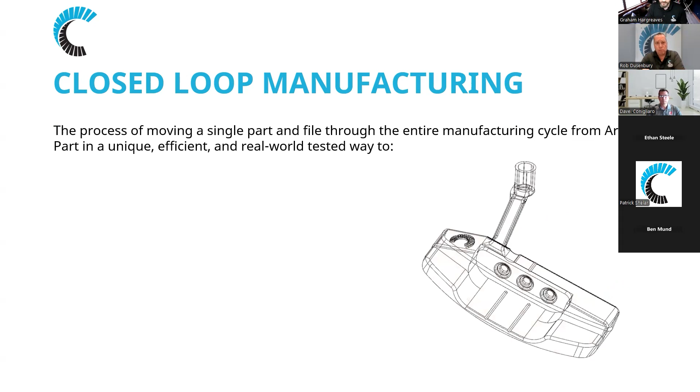So the closed loop manufacturing process, it's really taking a part from art to part in a unique, efficient, and real world way. This putter right here was actually something that we tested it out with. So we took it into Verisurf and reverse engineered an existing putter head, made some changes to it. We actually printed fixturing with Roboze on Carbon PA Pro because it's a relatively unique fixture. And then the putter was printed in stainless steel.

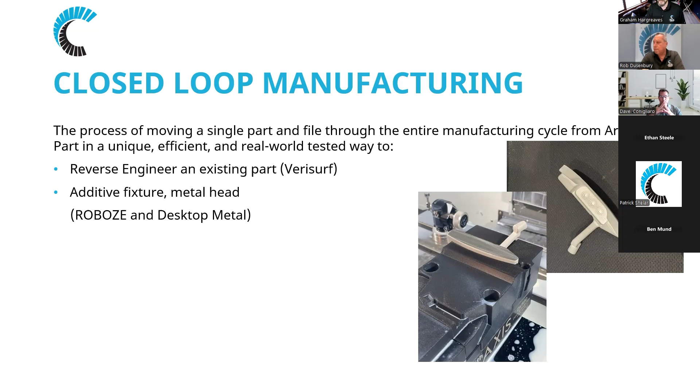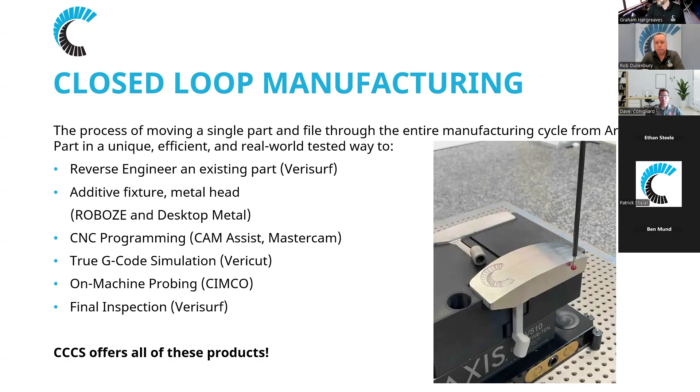The CNC programming aspect, we have CAM Assist, which is an AI tool that can plug into Mastercam as well. We then ran it through simulation in Vericut. We did some probing in CIMCO, so you get your probing routines in there. And then when it was done, we actually inspected it with Verisurf as well. So we do offer all of these products. We support them. And this is the putter in real life, and it did not help my golf game.

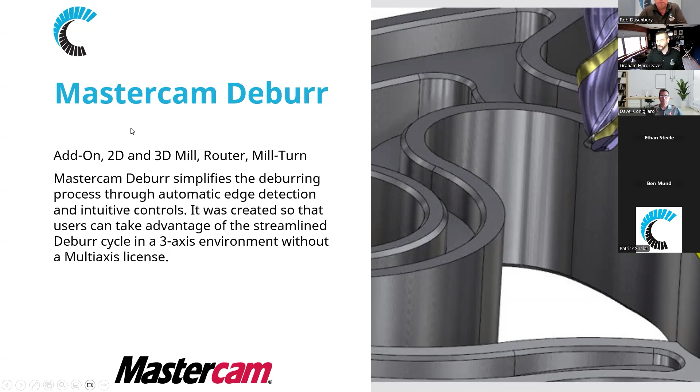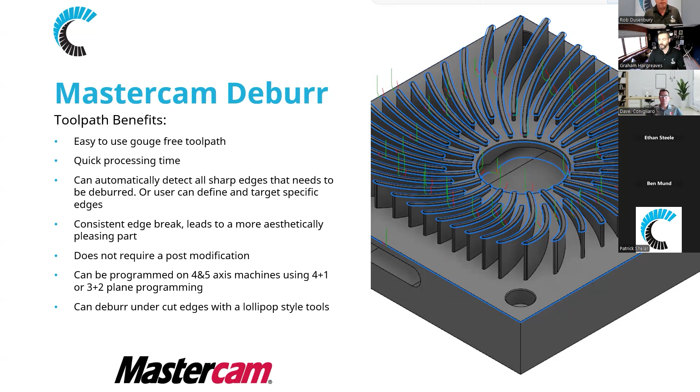And moving along, staying connected, we have Mastercam Connect. Now, you've probably heard of Mastercam Connect over the last few months. Basically, it's maintenance. But the advantage of staying on maintenance is that we released this Deburr toolpath program in 2025 when it first came out. And those were the tools that were supported: the lollipop, the taper with full radius, and a ball end mill.

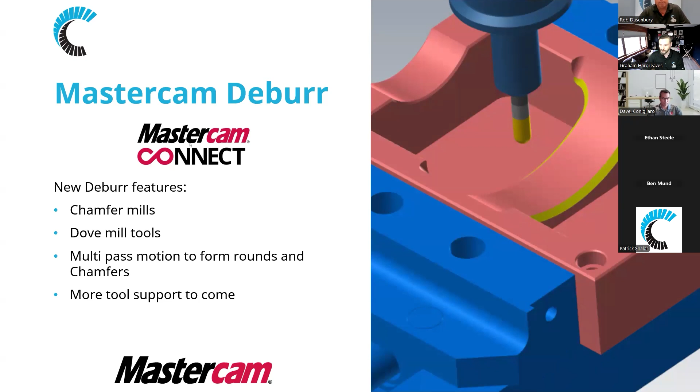Now, in the latest update 4 in 2025, we now support chamfer mills, dove mills, multi-pass motion for rounds, and chamfers. So pretty much the same controls that you have in your multi-axis Deburr, but locked down to, of course, 3 axis. And then, of course, more tool support to come. Okay, so that's how the toolpaths in this program work.

Now, I do want to add some additional talking points, and I think this is a really important talking point. Just safety. As you guys are aware, deburring parts, taking parts out of the machine with sharp edges, having to flip them over, moving it around, first that obviously creates a safety hazard. But also it can create inaccuracies in the part itself, especially if you have to take the part out of the machine to deburr, put it back in the machine for other operations. And of course, dealing with the sharp edges.

Also, I did this really quick Google search here on OSHA and found out that companies are losing employees for days or weeks due to lacerations, and it can cost the company up to $46,000 in direct and indirect costs. And I thought that was pretty interesting because, if you've been in this business for a while, you've probably sliced your fingers once or twice here or there. So obviously it can create hazards in the workshop. Go ahead and switch it.

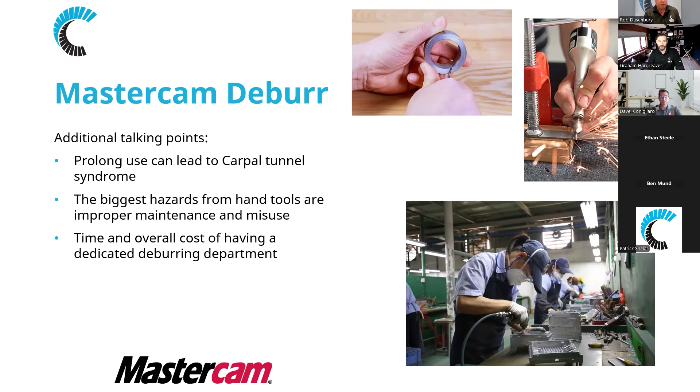Okay, so some other talking points. Using hand tools obviously can prolong and lead to carpal tunnel. The biggest hazard of hand tools is just improper maintenance and misuse. That's obvious, and I'm sure you guys have experienced it. And then the third talking point here is just the time and cost of an overall dedicated deburring department. If I can do this all in one shot, all on the machine, then this is a hazard that I don't have to pay for or deal with.

I think this is where you wanted me to go in and demo, right? Or I can't remember when you changed that.

Yeah. Okay, so I'm going to demo the product, and then towards the end, I'm going to show you how fast the calculations can be.

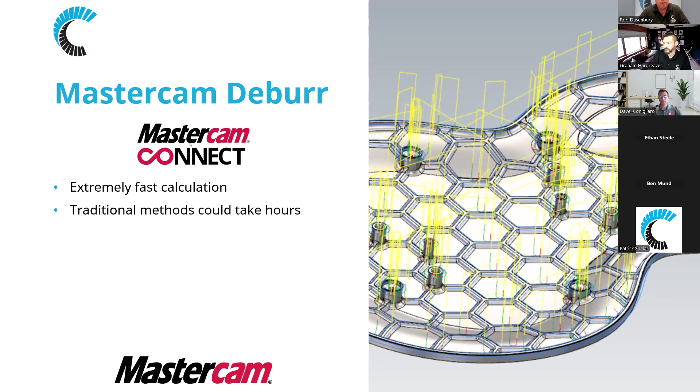So if you haven't seen it, we machined this part, this guitar at IMTS, and this is the bottom half of the guitar body. So you can only imagine how big this part is. Obviously, if you were going to try to deburr this on the machine, it could take hours to program.

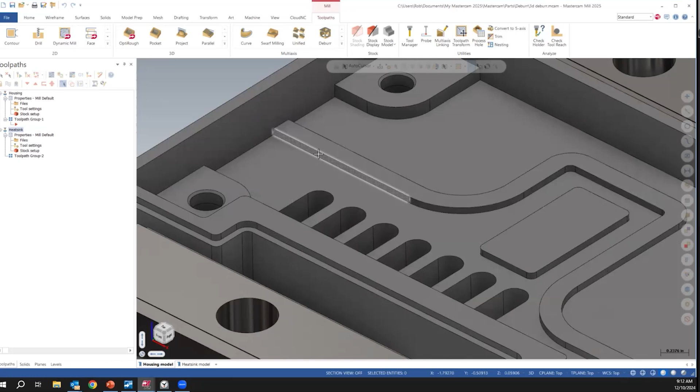So let me do a couple of things here. I'm going to share my screen now, Graham. I'm going to run through a few parts here. Here's a typical housing. As you can see, deburring this part, taking it out of the machine and having to scrape this with a deburr knife could be pretty difficult, especially when we're coming up against walls and very close to floors. I may not even be able to use my deburr tool in this area because it could scratch this floor.

So in 2025, and again, this is update 4, in the gallery here, we have the deburr toolpath. I'm going to grab a ball end mill, and we'll go through the cut parameters. For the machine geometries, I'm going to select the whole part. Okay, get that triple click. The reason I selected the whole part is this toolpath is gouge proof. So it's looking at all of those pieces of geometry and gouge checking against them.

For the edges, we have this auto detect. The auto detect can take care of all of the sharp edges, every sharp edge that it can find. And this may just be enough. However, if I do use auto detect, I can exclude edges. So if there's edges that I don't want it to find, let's say this is going to be chamfer milled, there's probably no reason to deburr that.

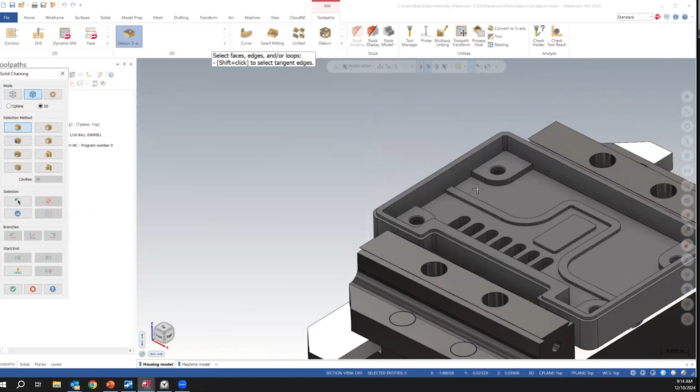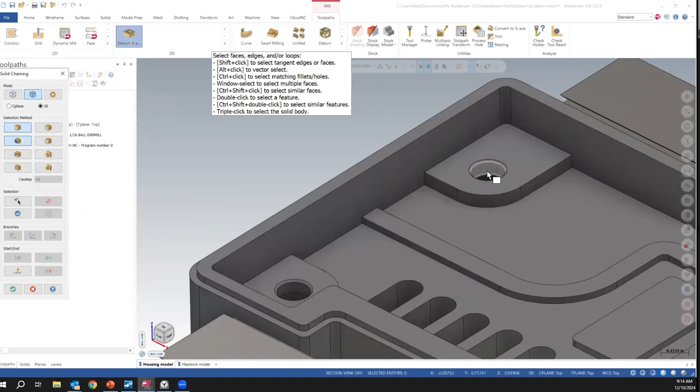So I'm going to come in here and, oops, hold on. I'm going to grab those edges. Actually, take that back. I'm going to clear this. I'm going to grab all those edges. I just held down Control Shift and picked those. Okay, so I'm going to exclude that geometry. We'll come back to some of the other settings as we go along.

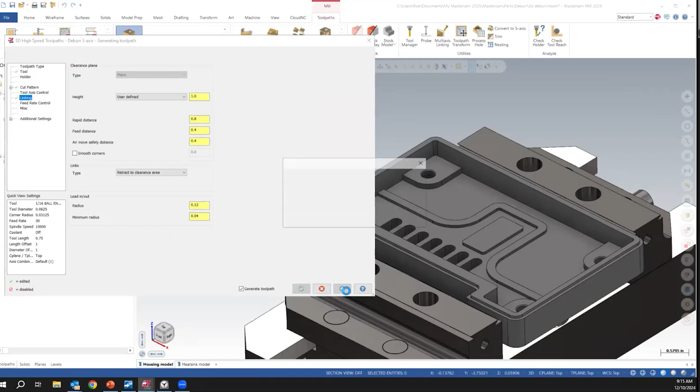With the edge shape, how much do I want to break the edge? Let's say 10 thou. Tool axis control, obviously it's 3-axis, locked to the Z. Linking, I just want to be 1 inch above. There's some automatic settings here. This menu is pretty similar to what you've seen with other toolpaths inside of Mastercam. And some feed rate control. But as it sits right now, I'm just going to hit the apply button and let that run through.

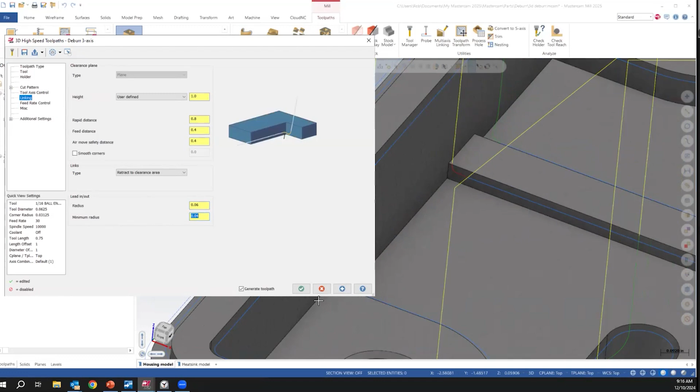And as you can see, that quickly, all of those edges are nice and deburred, gouge checked. You have some control here. We can tighten up the radius, maybe get this a little closer for the lead ins and lead outs. Again, it's completely gouge checked on those edges.

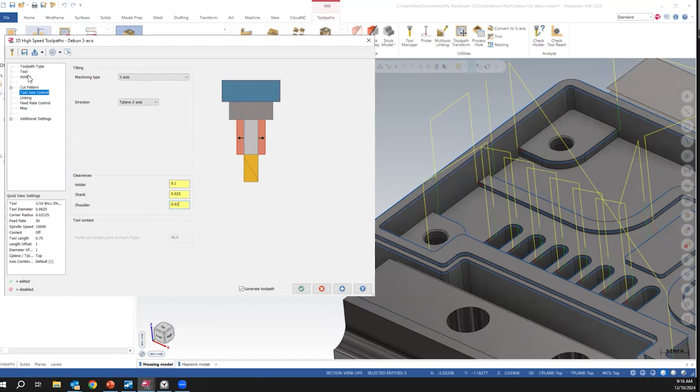In the tool axis control, this is where it's gouge checking. Here's your clearances. So I have 100 thou on the holder, 25 on the shank, and 10 on the shoulder. Those can all be adjusted, but going back to your tool, it better be defined properly, and same with your holder, to make all of that work. And we'll give it a quick run through here.

And again, nice, clean, sharp edges. Everything is consistent. And this is what literally separates one machine shop from another shop. If I sent this out to a customer, he's going to be more happy than if he saw a bunch of scratches on the part and inconsistent deburr operations. This is just clean and gouge free.

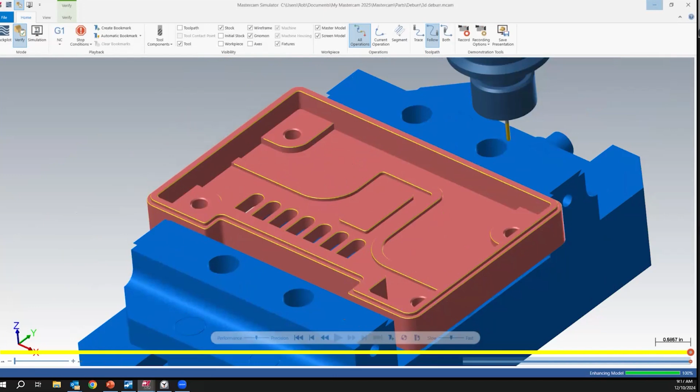Okay, so moving on, I'm going to go into my next part here. Let's turn off this guy. So on this part, I have this heat sink. Reason I made this part is obviously heat sinks are nasty, a lot of sharp edges, a lot of deburring. Very daunting if you had to do this in program.

Not only that, if you had to program it manually or traditionally, again, we're looking at this and obviously it's a 3-axis part as well. And again, keep in mind, this can be added to a 2D mill or 2D router. So we'll go back into the Deburr. I'm going to switch over my tool. And again, I'm going to grab the whole part.

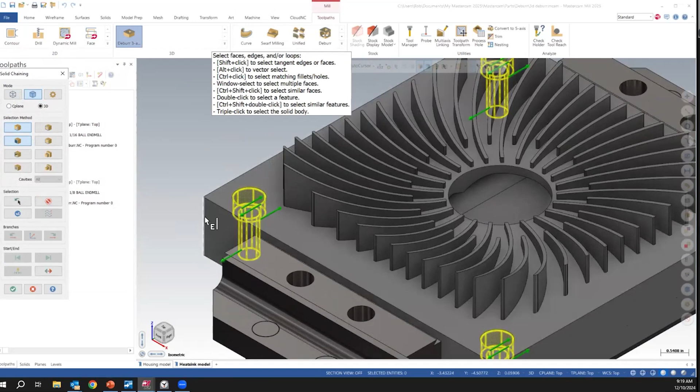And I'm going to leave this on auto detect. I'll come back to the other option, user define, in a second here. Again, just want to exclude. And again, I'm going to hold down Control Shift and double click on that to grab those features. I'll break the edges by 10. And again, let's set the linking. Let's make that like 1 inch. Okay.

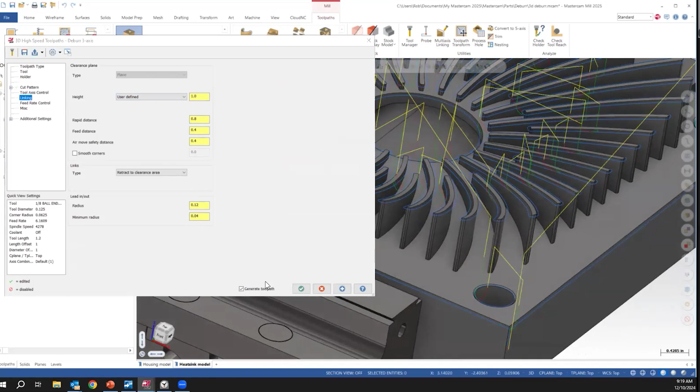So I hit apply. And let's get out of here. Oh, I must have left out an edge. No big deal. We'll come back into the cut parameters. Let's just add. Let's add those. Okay. All right.

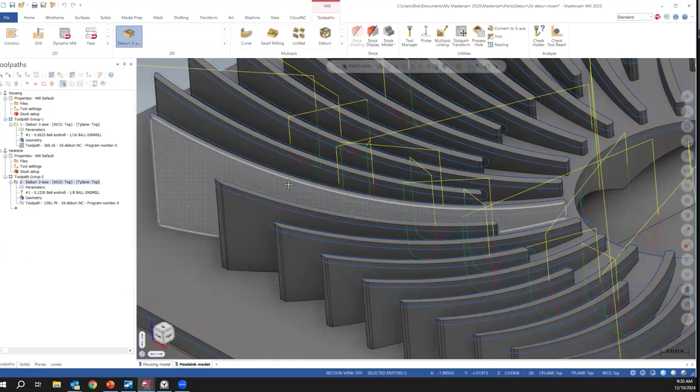Now, as you can see here, nice, clean, again, gouge free, checking against the other blades. Of course, if I went in with too big of a tool, then it would trim it back. So it may not deburr everything because of the gouge checking.

So another feature that we have, I'm just going to copy after here, is the ability to use lollipop cutters. Now, this has been a request from 25 years since I've been with Mastercam, that everyone wants to do an undercut with their mill product without having multi-axis. As you know, you can do this with a lollipop cutter, but you'd have to turn off all

your gouge checking. We tell you you can use contour and surface contour, or you can use flow line with all the gouge checking turned off. But of course, when you turn off the gouge checking, you're on your own. Lead ins and lead outs don't happen for you, all that stuff. So with this enhancement, instead of doing the auto detect, I'm going to do a user define here, and I'm going to grab

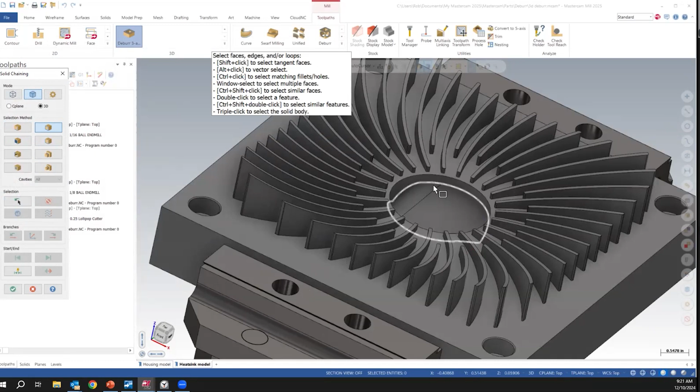I don't know why I'm... I want to grab that loop. I'm having mouse problems. Okay, I'm going to grab that loop. Again, now 10 thou. Tool axis control, everything's still the same. All I really did here was just switch over to the lollipop cutter, and we'll apply that.

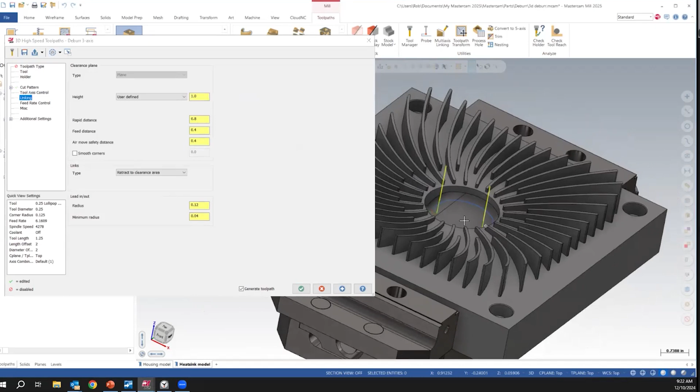And as you can see, a nice, clean, gouge-free undercut. And I can't tell you how many times I've had customers request just to do this. Okay.

Now, one of the other advantages to this new update is we now included the ability to put rounds on these edges. So even though I have this part here that is an undercut, this is another feature that you guys have been requesting. If you had a fillet in here, and of course I'm not going to draw in the fillet, I'm just going to tell it that I have a 30 thou

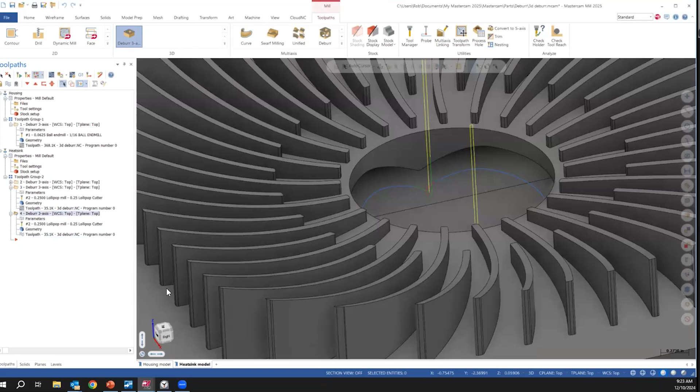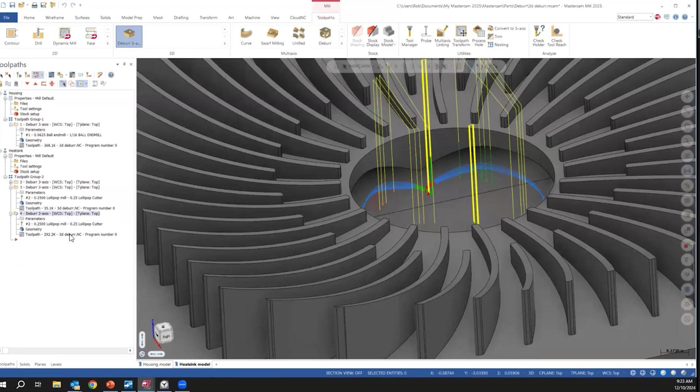rad there, and I'll set that to round, and I'll give it, I don't know, 10 passes. I'll hit apply. And as you can see here, let's just take that in. Okay. So now we can apply those radiuses on those corners.

Definitely having mouse issues. On those corners, and again, all gouge free, not a whole lot of work. Obviously, I didn't have to do a whole lot of work to put that in there. Just had to tell it the size of the rad. So that's enhancement number 1 in the update 4.

Enhancement number 2, we can now apply chamfer tools. So for instance, now if I want to come back in here, I'm gonna just do a copy after. I'll kill this, and I'll move over to my chamfer mill. And user-defined edges, I just want to do that loop right there with a 30 thou chamfer.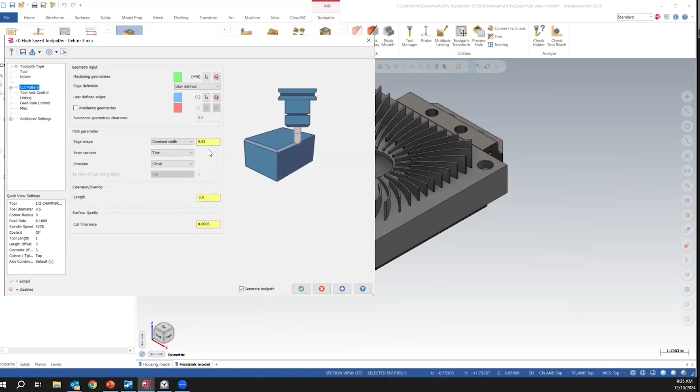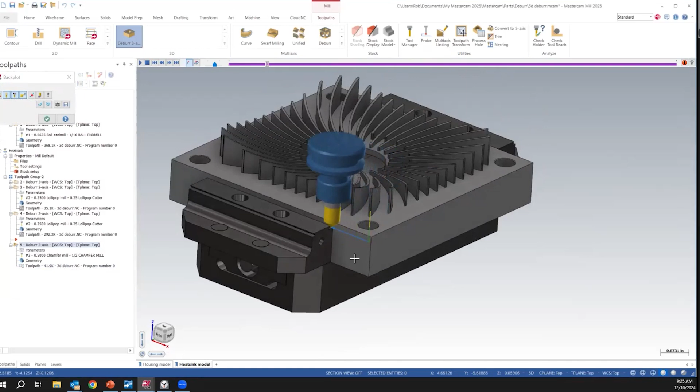Again, my collision. And I'm going to let that run. It's going to hit the check mark there. So let's take a look at, of course, it's doing the chamfer, but let's look at what's actually happening here. Right in here. Okay, obviously not a good idea.

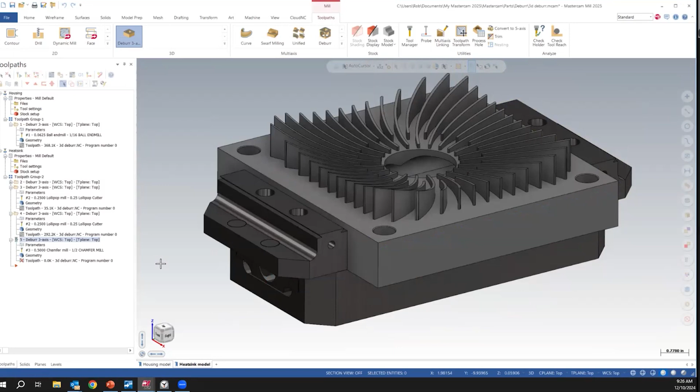So a way to combat that, I actually have 2 ways to do it. If I don't want to hit this, I'm going to come back in here. And again, I mentioned this earlier, but we do have avoidance geometries as well. So I can tell it I want to avoid that and that. And I want to avoid it by, let's say, 10 thou. And again, there's my avoidance.

So obviously, if we did this the traditional way, we would have to trim, we'd have to do all the kind of things to a 2D contour toolpath, which you guys, if you've tried that, already know the headaches. Okay, that's one option. Option number 2 is, I don't want to avoid this. I think I can get in there with that tool.

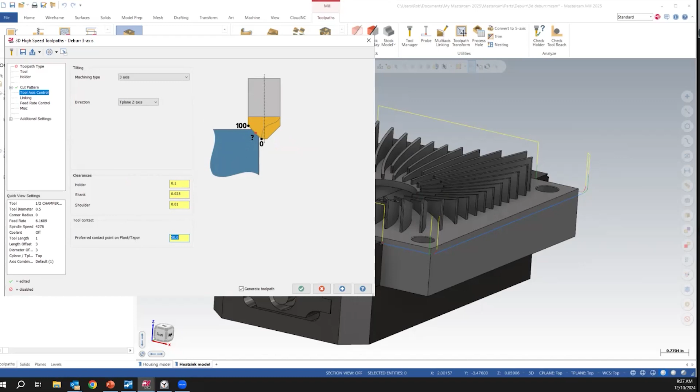So one of the nice advantages of the chamfer toolpath is I can tell the toolpath where to ride along that edge. Right now it's 50%, it's right in here. If I wanted to go further down, maybe because I want to get onto a larger diameter without having to crank up the spindle speed, that would work. Or in our case, maybe if I just make that 25% and I slide down closer to the tip,

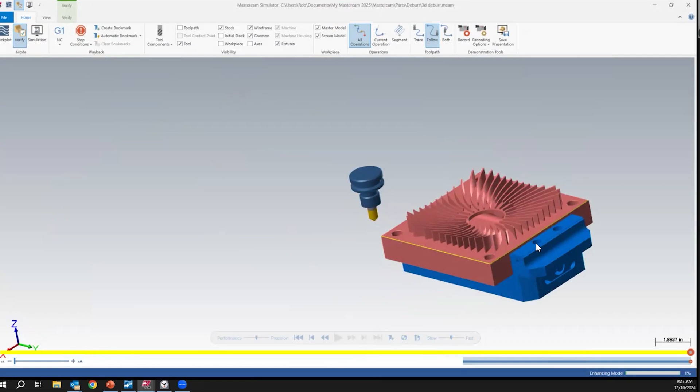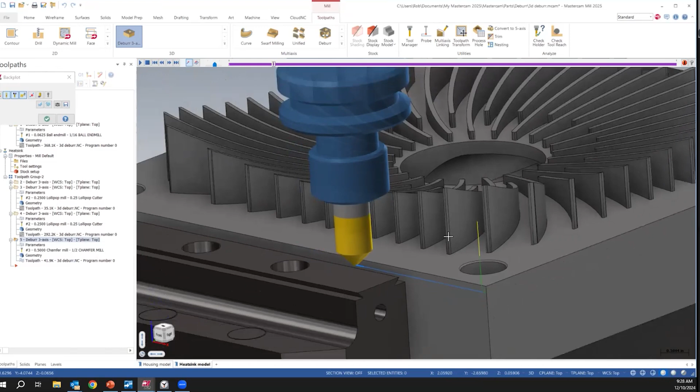and let's just take a look at that. Oh, I don't have my fixture over there. I must have missed one. But as you can see, we can clear it. We've got the chamfer. Both are good options. Obviously, avoidance areas are necessary. One of the ways I could have handled this hole, if I already had the socket head screws in there, I could tell it avoid that. I mean, there's so many options there just to control these toolpaths.

So again, brand new in update 4 is the ability to put rounds and chamfers or chamfer tools, and option or advantage number 3, which is going to be dovetail cutters. So if I wanted to deburr the bottom of the part, obviously the collision is going to come into play here. Without flipping it over, we now are supporting dovetail tools.

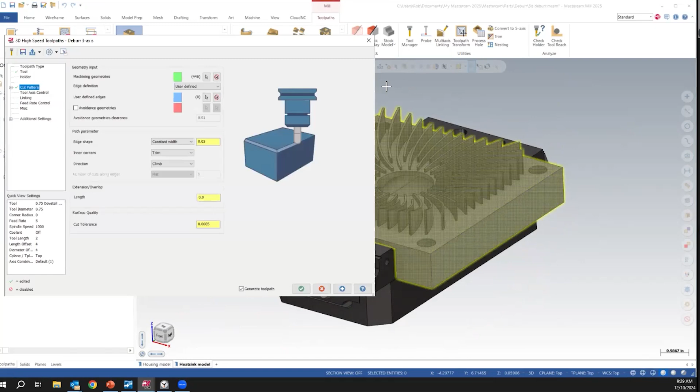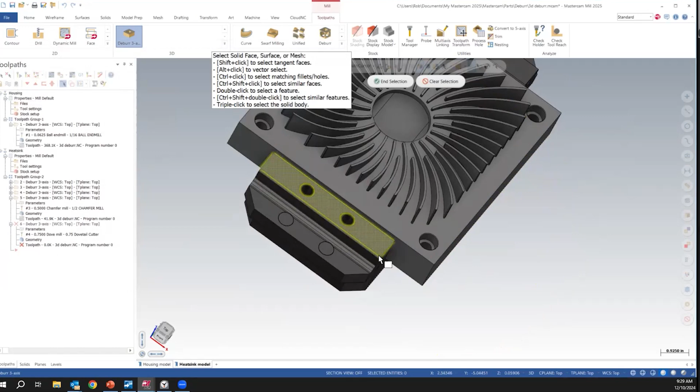So let's just go back in here, select the dovetail, go pick the whole part again. Oops. Let's go user defined. I'm going to use the bottom loop. I'll make it a 60 thou. And of course, I want to avoid that. Okay. And 1 inch, that works. Let's give it a ride.

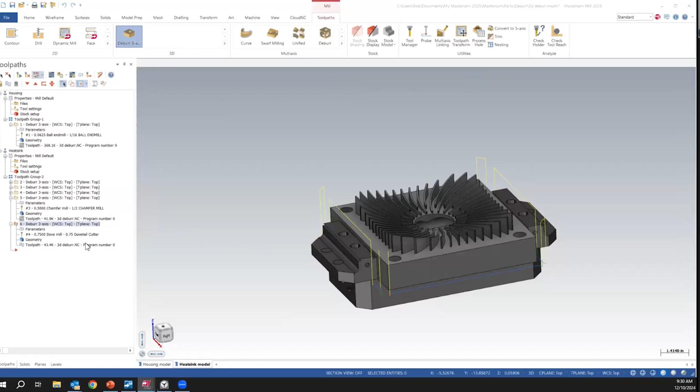And of course, nice lead in and lead out off the part, off my fixture. Nice clean undercut. And obviously, you may not do this type of operation with this part like this, you may flip it over and do it. Just again, just showing you that option of putting in that 60 thou chamfer with a dovetail cutter.

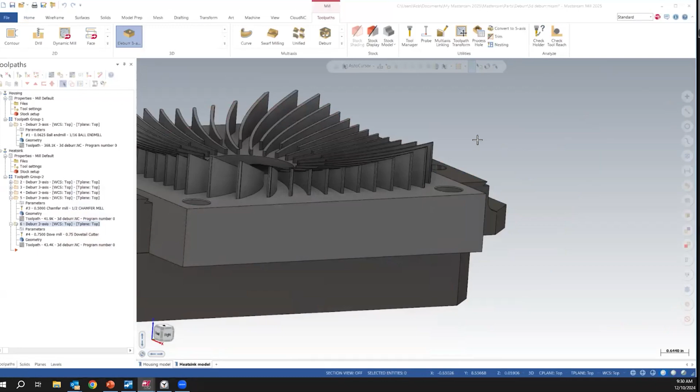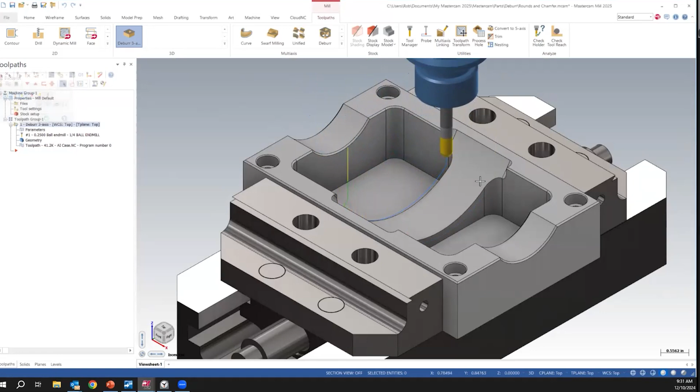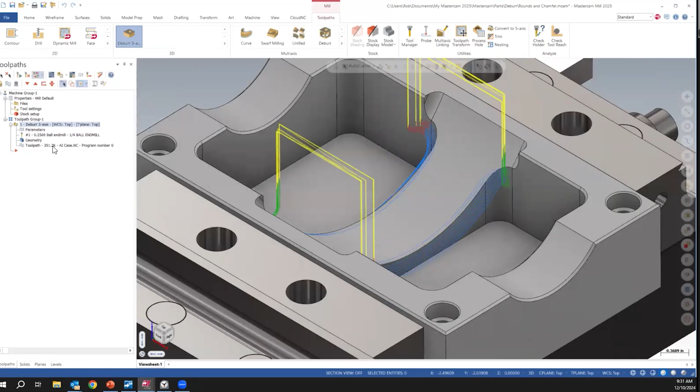Okay. Let me just open up a file here and show you the chamfers and rounds. So of course I have this toolpath and I'm just breaking this edge. And the other edge. But let me show you again in the cut pattern. I set this to rounds, we'll make it an 1/8 inch radius. We'll give it 10 passes. We'll apply that. And as you can see, we have the rounds.

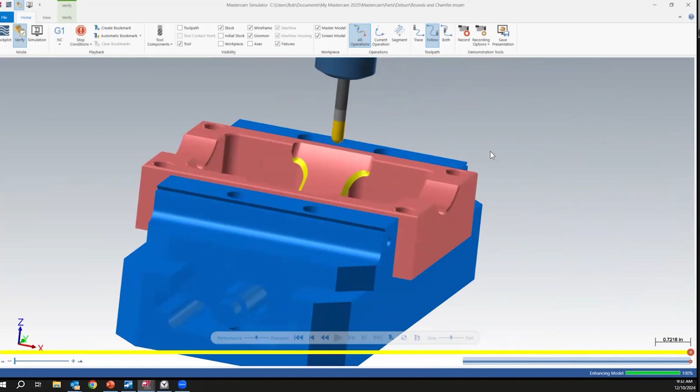Quick way to put fillets on. Completely gouge checked against that edge and that edge. And if I want to change that to be a flat, now I have that machined flat in there. Without having to use the love-hate relationship with Flowline. Pretty easy, pretty simple.

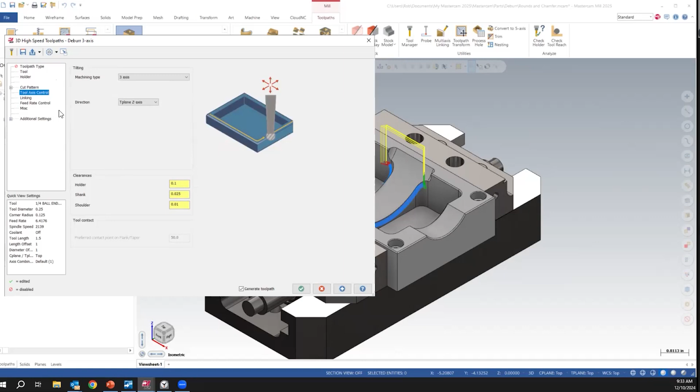And with that, before I go into that other part, Graham, I'm going to ask Dave if there's anything I kind of missed or should enhance. No, it's pretty thorough. If you want to show something cool, you can slap the blend spline on the linking page. Oh, that's pretty neat. Right. Yeah, just to show it so people know it. Yep. Bottom, yeah, turn that one on.

So what Dave's talking about here is in the linking, obviously I'm retracting to the clearance, but we have a clearance blend. Yeah, just regen that. What's up? Yeah, just regen that. There's no setting.

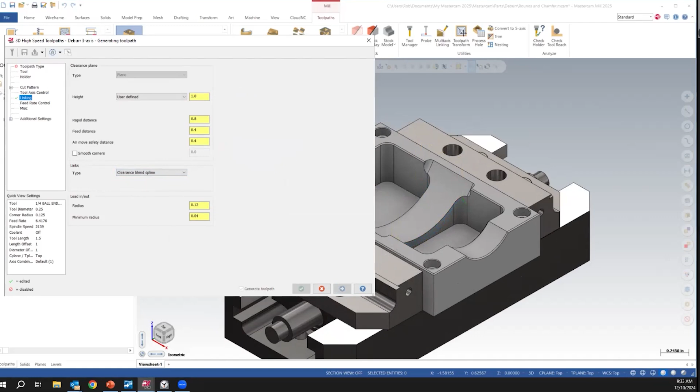And so now we have these nice blended moves across. And then, especially if you're running a high-speed machine, on the feed rate control page you have control of that feed rate. You have control here for the blend. And obviously you can replace with rapid. I would leave that as a feed rate and then increase that feed rate.

So now you're not making sharp, jerky moves with the machine. It's smooth. Sometimes you'll see that toolpath and say, that looks very strange. I'm so used to just regular retract and rapids. But once you start getting into some of these linking controls and using that blend, especially on your high-speed machines, I think you'll enjoy the outcome.

Yep, it's like anything, right? Depends on the machine's capabilities. It's just sending the motion out that your machine wants. You got an older, slower machine, you want those G0 rapids, absolutely. But if you got a fast machine, there's less hesitation here because there are no harsh 90-degree direction changes. The machine just moves real fluid. The toolpath has the ability to kick out motion friendly for your equipment.

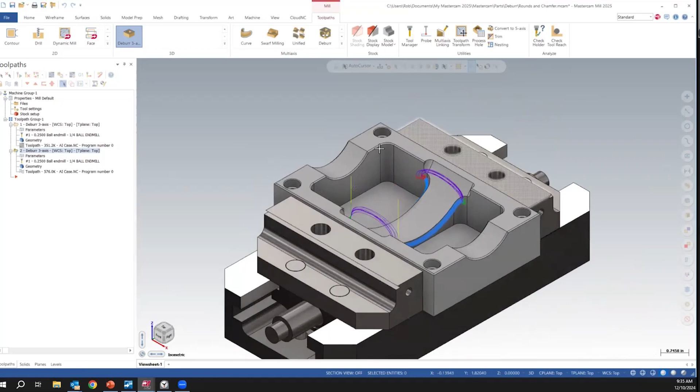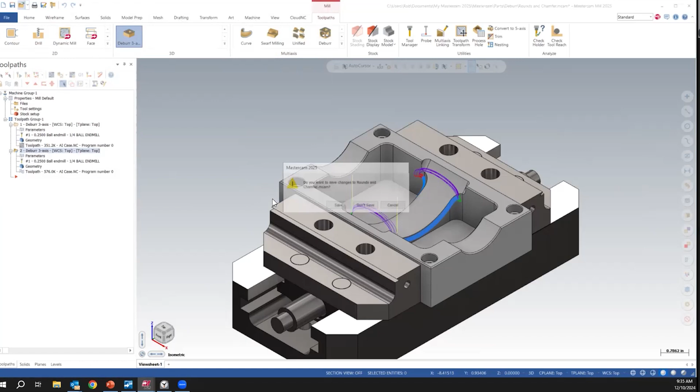All righty. Graham, did you want to go into questions first or go with that guitar body? Well, we can answer these two questions while you're opening that up. And this guitar body is the one you're going to do your time test on, correct? Yeah. So having seen what you've seen, if you haven't already guessed how long it's going to take to calculate with this guitar body, go ahead and throw that into the chat.

One question we have is, will chamfer mill only work for 2D surfaces? No. The chamfer mill will work on 3D surfaces as well, as you can see with that last part I had. Next question is, will these features work with 2024? I believe the answer is no. This is released with 2025, and those new updates are 2025 update 4. So you have to have 2025. One of the benefits of being on maintenance.

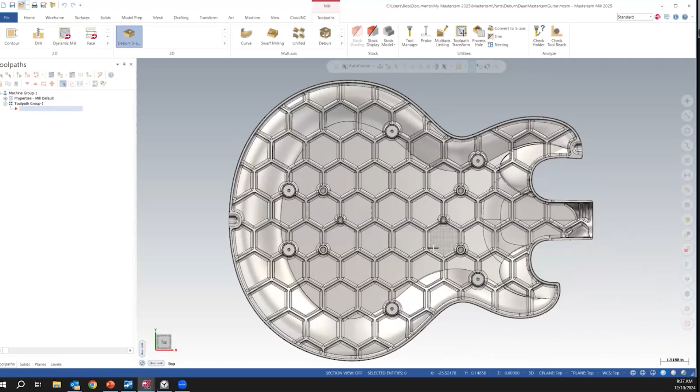Okay. Let's take a quick look at this guitar body before you guess. This thing's roughly 20 inches. Obviously, a lot of edges in here to have to deal with. You can only imagine having to program this traditionally. So I'm going to take this into Deburr, and I am going to pick the whole part. And while you're making your decision, notice that there's 1,859 machining geometries in here.

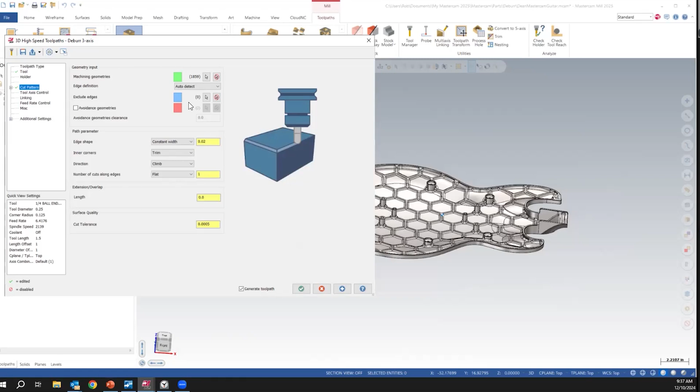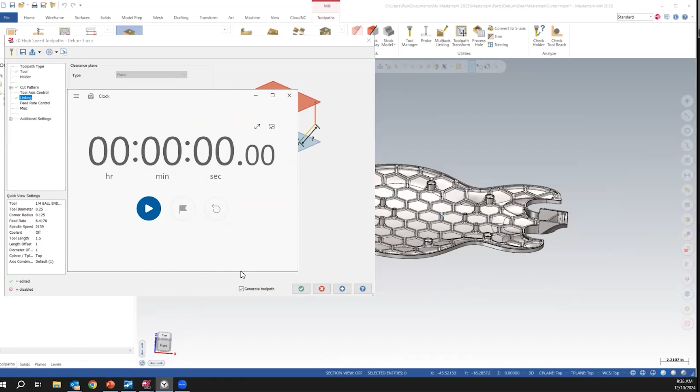I'm just going to do the auto detect, all the sharp edges. We'll break it at 10. We'll link it 1 inch. And I'm going to bring up the stopwatch. So, all right, if everybody's made their guess, I'm going to try to be quick here. I'm going to hit the check mark, generate the toolpath. We'll bring up this and we'll start.

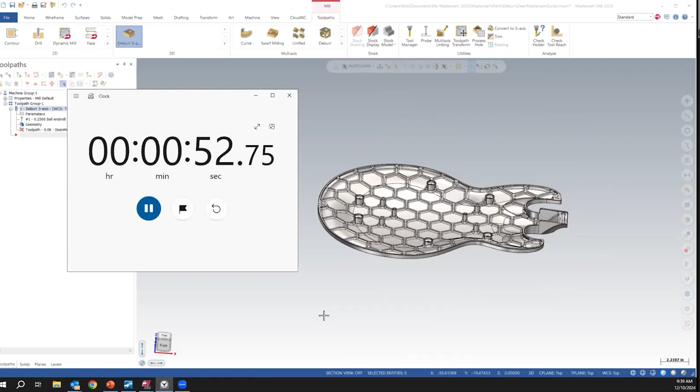Yep. Another question in the chat too, unless you want to wait. Well, let's run through this first. And again, this is complex geometry. This would be something you would not want to hand deburr. Yeah, it would be awful to scratch this part during the deburr process. All right. There's the number. Less than a minute. Nice and clean. And again, I can't stress this enough. Gouge checked. Just a clean toolpath with consistent edges.

Did you say there was a question, Graham? Yes, this is more of a 5-axis one, but may as well go after it anyways. When I am using Deburr 5-axis simultaneous, when the tool is doing a transition, it has some funky linear moves and sometimes the table moves really fast on rotation. Will I check mark feed rate control to fix that? You could. I think the links default to rapid anyway. So you could put all your retract and links to feed rate and then use your feed rate control.

Some machines, like a Haas UMC, actually do prefer the rapids replaced with feed rates. And of course, then you can control how fast that move is. So it's machine dependent. If I was going with an Okuma with their Super NURBS and all that, then it enjoys the G0 moves instead of the G1 moves. So it's all relevant to the machine.

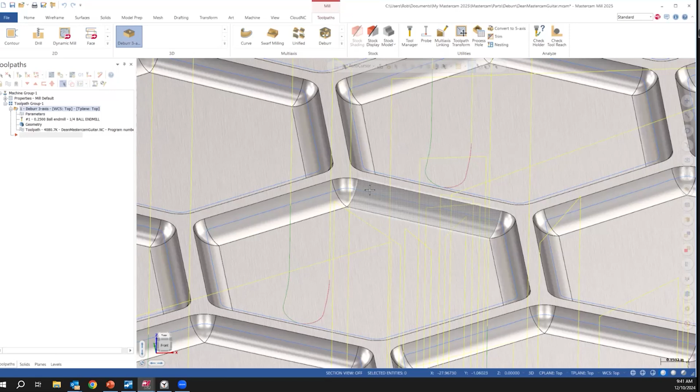Speaking of the difference, now one thing that Dave brought up yesterday when we were talking is that if you already have multi-axis, obviously you have the Deburr toolpath in the multi-axis suite. But with your multi-axis license, you also get this one in the 3D suite. And the difference there would be, of course, you can lock your tool axis to 3-axis in the multi-axis toolpath. But keep in mind that's vector based.

So the code is going to look more TCP versus the 3D toolpath, which is an actual clean 3D toolpath. So that's the difference. If I was running this on a standard 3-axis machine, this is going to give it better output than trying to use the multi-axis locked at 3-axis.

Josh had a good question about would it be better to not have any of the chamfers or edge breaks drawn in the model, modeled into your solid, right? And the answer is an absolute yes, because this toolpath detects the sharp edges. So if you have chamfers already, it's going to detect the top and bottom sharp edge of that chamfer. Now, there is a filter in here. There's more to this than we can demo, but there are some angle detection limits.

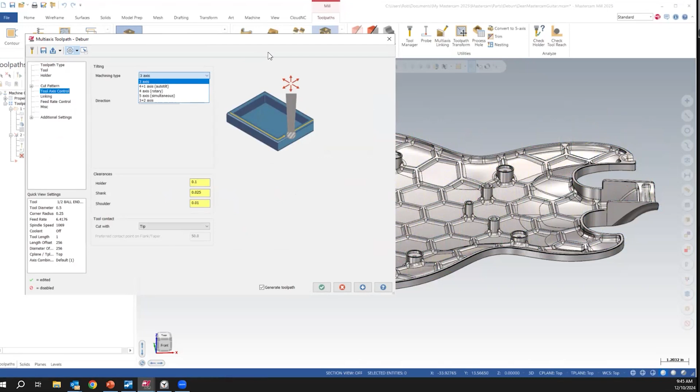The difference with the 3-axis here and the Deburr 3-axis version of the toolpath is in your NC output, like Rob was saying. You're going to get more of a TCP format to your code when you use the 3-axis version of the 5-axis Deburr. When you use the Deburr 3-axis toolpath, your G code, your NC file is formatted to reflect more of a tilted plane style of code. So they are different. And we experienced it recently. A multi-axis customer actually preferred the formatting of the Deburr 3-axis, even though they were on multi-axis equipment.

So it's kind of like you can have it your way. Two different ways to get 3-axis output, whatever you want. Just like the Rapids, have it your way. Do you want G0? Do you want a blend spline? What does your machine want? What's your personal preference with the way you're looking and reading the G code? So there's a lot of flexibility here.

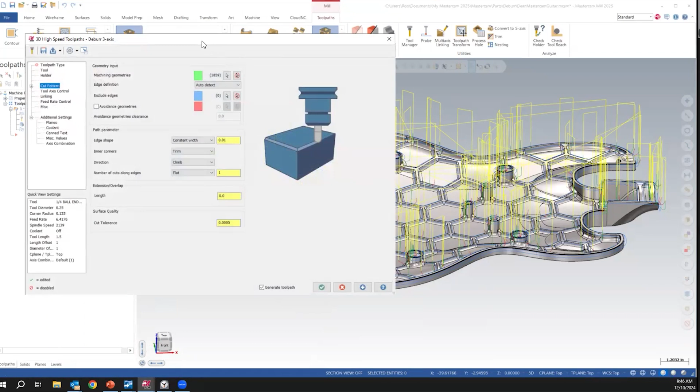Yeah. Awesome. Thank you. So obviously, in this Deburr toolpath, 3-axis is the only output. Yeah. And this is a very different version of that 3-axis output. This is a tilted plane approach to the code output.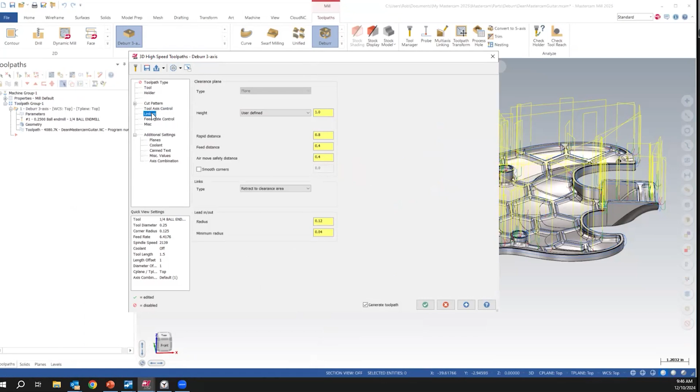I gotta go. Also, here's the edge treatment stuff that Dave was talking about. So you can control some angles there. Obviously, the beauty of this is if you do make changes, you saw how fast that calculates.

You know, Mastercam's come a long way. I mean, I am just impressed with how quick and easy I get toolpaths presented to me. God, it used to be so hard just to sit there and wait and then have to change and come back and wait. Now I don't even have to leave the page, just hit the apply button. That's been a huge benefit in Mastercam for the last couple of releases.

So advantages of staying on maintenance, staying connected, if you will. This stuff just gets faster. You may not see a lot of big changes in the software and think that it's not a reason to update. But I guarantee you, one of the biggest reasons to update for me is the fact that it's just fast. I can show you all of these parts, and we did it in less than an hour. I couldn't have done this, the way it calculated, 5, 6 versions ago. So definitely an advantage. Time is money. Time is always money.

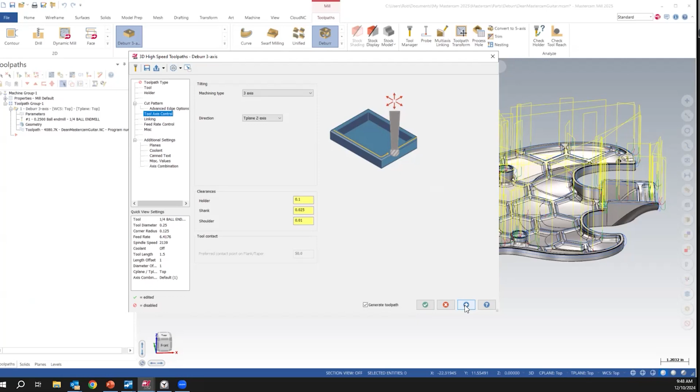All right, got some other questions coming in here. Well, just the one that Dave answered. So was Lollipop using gouge check on the backside? What about using a back corner rounding mill? And Lollipop does support full gouge check, no radius mill support.

I'm sorry, what style tool? He's asking about a rad mill. Oh, yeah, a backside rad mill, but no, the rad mill is not supported. Yeah. I mean, a rad mill would only be useful for planar edges, regardless, but it's not supported today.

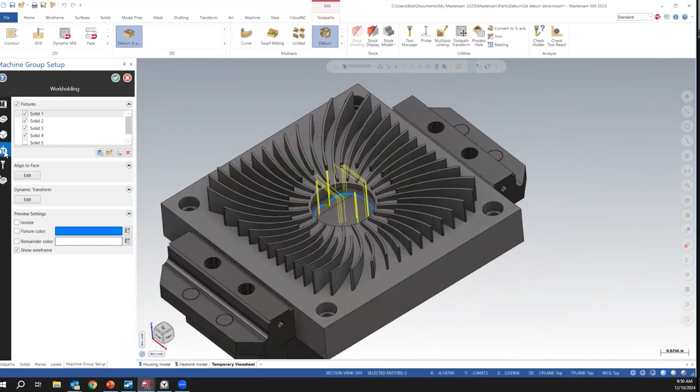But you still have that option. Absolutely, and that is fully gouge checked and safe. Yeah. Yep. So I get it. The rad mill is enticing because it's a single swipe, right? But no, a rad mill can't do this anyway. You can't use a rad mill in 3D. It won't compensate accurately. But you take those multi passes and have one smooth, perfect radius under there as opposed to doing it by hand.

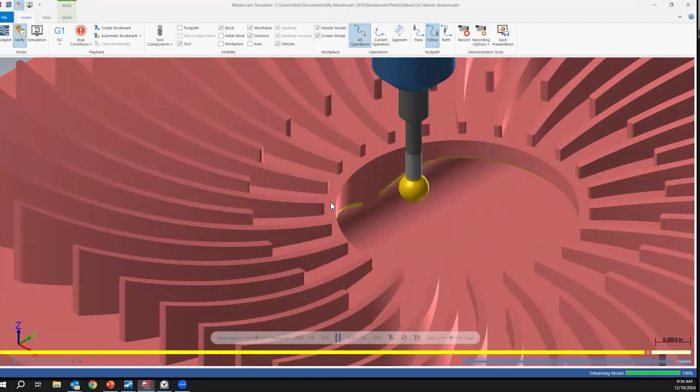Yeah. I mean, it's like, oh, there's multiple passes, it takes more time. Not really. No, it doesn't. Not in the grand scheme of things. That's a lot quicker than you'd ever put a round under there. And you'll never, ever put it on there accurately by hand. It's impossible. Unless you are amazing. That's a consistent rad right there. And usually you're not making one heat sink at a time.

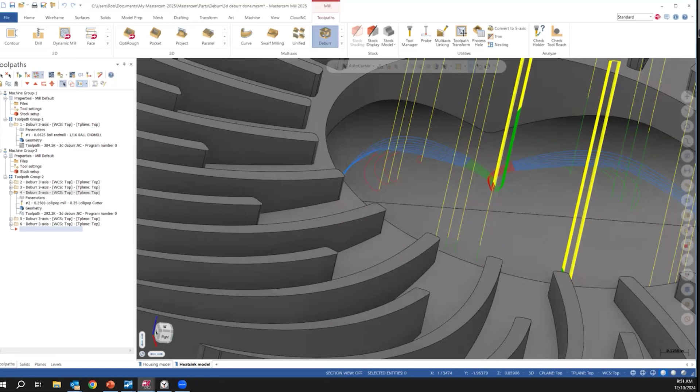I got a question for you, Dave. Any chances we can get this as a zigzag motion? Yeah, well, we've had some discussions with them about cut order and such, and right now the cut order is controlled with the toolpath, but everything's on the table. Like people have asked about inside out cut order or outside in cut order. Yeah, I was going to ask you that too. None of those complications are in this toolpath quite yet.

And the other thing that comes up a lot, we'll just head off a question, is if you're going manual, and you saw Rob showed you how you can just pick the edges you want to machine. So if you picked a number of edges in a certain order that you desire, it will not always machine in that order. And you have to understand that this toolpath needs control of the cut order to make sure that it can do things safely. Because if you're coming up to a vertical edge, it has to understand, well, has that vertical edge been deburred yet?

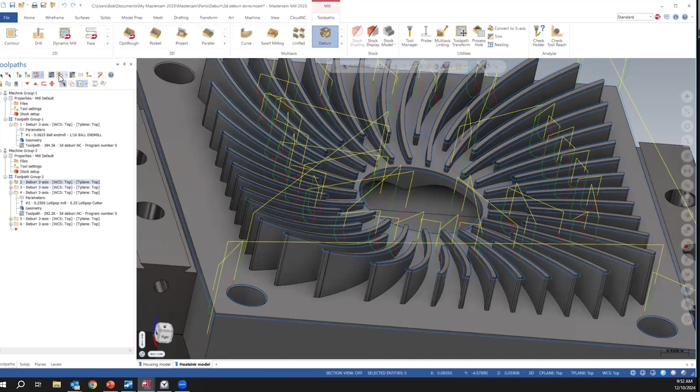Like you can see the vertical edges on this part, on his outside, have a little bit of motion because the ball end mill can reach down there on the outside of his block. So if you're coming up to a boss with sharp edges, and then you're chamfering toward it, the software might say to itself, well, if I machine the vertical edge first, then the horizontal edge can get even closer. I can cut more of it. So there's a lot happening with the cut order. So there's no explicit control yet. Let the toolpath do its thing.

And you can see, I mean, look at this. It's not like it was jumping around. It was pretty consistent there. But there are times where you might want to hold its hand and say, go here, then here, then here. It might not follow that. But it's not going to do something crazy and just bounce around. It needs control of the cut order to ensure that everything is safe.

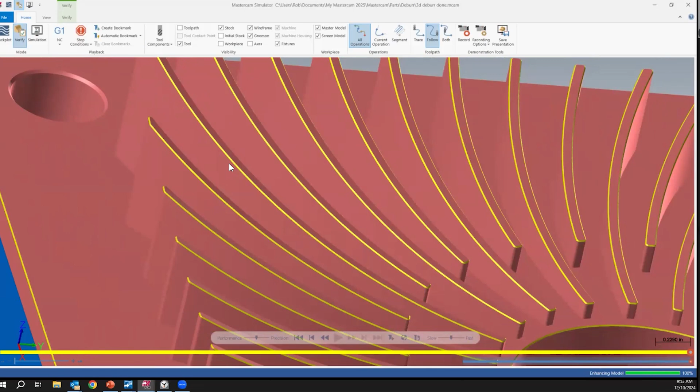Because it knows this is a tight part here, and it might be in a situation where when it's cutting one edge, it could be hitting another edge, so you have to give it freedom to have cut order control. But we have discussed that, especially the cut order with the multi passes. It would be nice to say out-in, in-out at least, and zigzag, but not yet. The focus of the core tech on this toolpath is making it safe, making it reliable, and to be quite honest, we just don't want to overly complicate it with settings. Keep it simple. Keep it very simple.

But the cut order thing could make sense, like the in-out, out-in. We can totally understand that relevant to tool wear and what part of that ball you're cutting with. You want to cut with the deeper gullet of the flute. Sure, maybe you wanted to go in-out or out-in. But nothing yet. But it usually does a pretty good job with the cut order, and everything is safe.

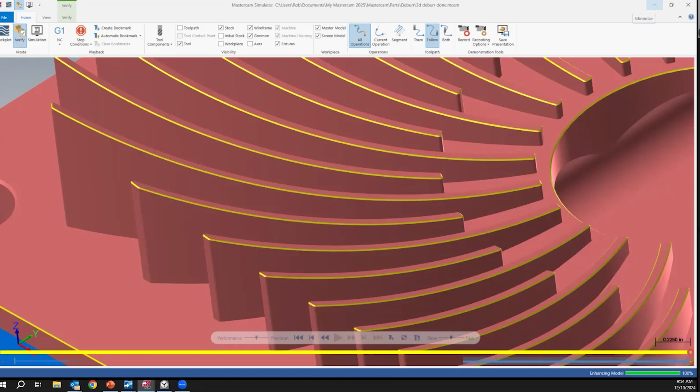Another question here, a couple. There's a price question, and we'll talk about that in a moment. If the fillet runs to the edge, how will the chamfer look? Say that again. If the fillet runs to the edge, how will the chamfer look? The fillet runs to the edge.

Oh, down. You mean on up here? I don't know where we're talking about. All right, well, Juan, you can shoot us an email about that.

What if the edge break requirements are different from edge to edge within the same part? So this part here that I did, obviously I put 10 thou on these edges, and then I did put a chamfer here that was 30 thou. I put a chamfer down here that was 60. So obviously the way to accomplish that is to just copy the toolpath and just select the geometries that you want to machine with those settings.

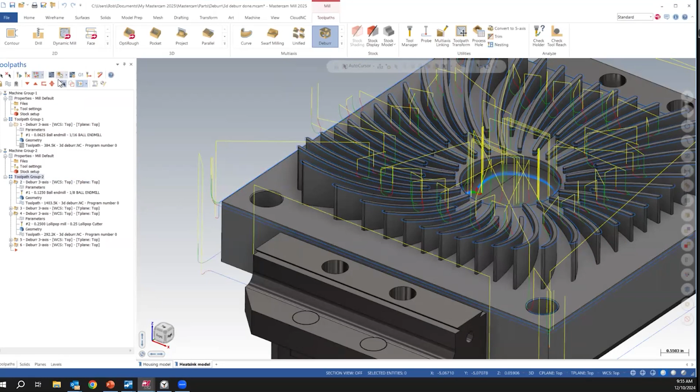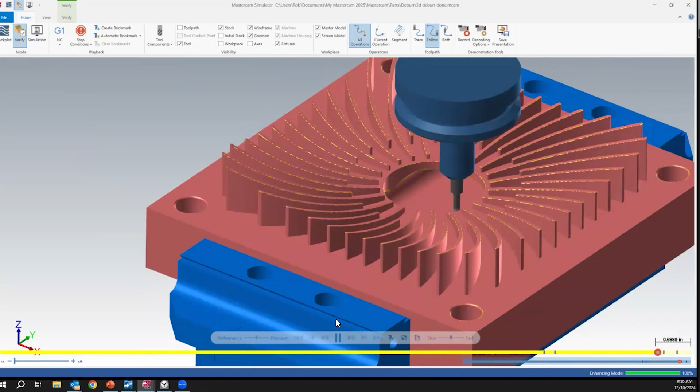And this pretty much has all of that, right? That question has come up, yes. And if you take pause for a moment there, you could imagine the interface. Now I have to somehow say automatic, and like the exclude edges, you have to have some way to manage these custom edges. And you got to pick them all, put all your values. So the toolpath gets complicated. And you run it and you process it and you get it. That's pretty involved, when today it's just, yeah, I get it.

It's a separate toolpath. But in that moment, you do have explicit control of all the other settings that you might want to change depending on the size of that edge treatment. Who knows? You might want a different lead in, different lead out, or something. But we've explored it, and it's almost like we would overly complicate this toolpath for the sake of having one toolpath in the op manager, when in the end, it's not doing anything to make your G code more efficient. 3 toolpaths or 1 toolpath, that means nothing to the NC output.

But having one op support all that custom definition per edge is very complicated. So we've kind of put that to the back burner, but people have asked it a few times. So we continue to put thought into it, but there are no plans to go that granular.

So as Rob said, basically every part needs to be deburred. It eliminates the need to hand deburr, saves your hands. This is pre-existing in multi-axis, but now it's available for mill, router, the 3D versions, and mill-turn. So I think that answers one of those questions. This can be used in lathe if you have a mill license as well.